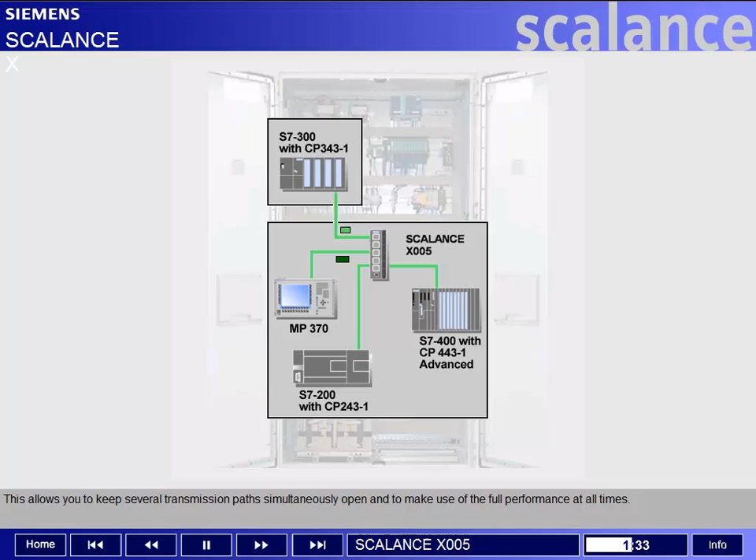Unlike a hub, which is a simple distributor of incoming data to all ports, the Scalance X005 is a full-fledged switch which transmits messages only to those stations for which they are intended. This allows you to keep several transmission paths simultaneously open and to make use of the full performance at all times. This functionality is housed in a robust and compact casing. Protection to IP30 ensures its suitability for industrial use.

Because of its variety of installation options, the Scalance X005 always finds its place inside a control cabinet, on a top hat rail, on an S7-300 rail, or in various positions directly on the wall. The station connections are equipped with a retaining collar designed to take up the rugged Fast Connect plugs. The plugs are snapped into place on the housing and provide extra strain and bend relief.

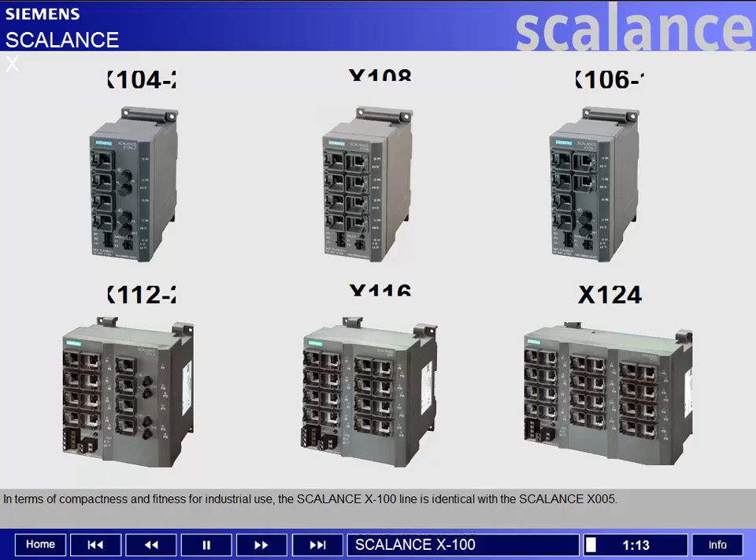In terms of compactness and fitness for industrial use, the Scalance X100 line is identical with the Scalance X005. The two systems differ mainly in the number and design of the network connections. Depending on the version, 4 to 24 electrical and in combination up to 2 optical ports are available. In addition, the devices have their own simple diagnostic mechanisms.

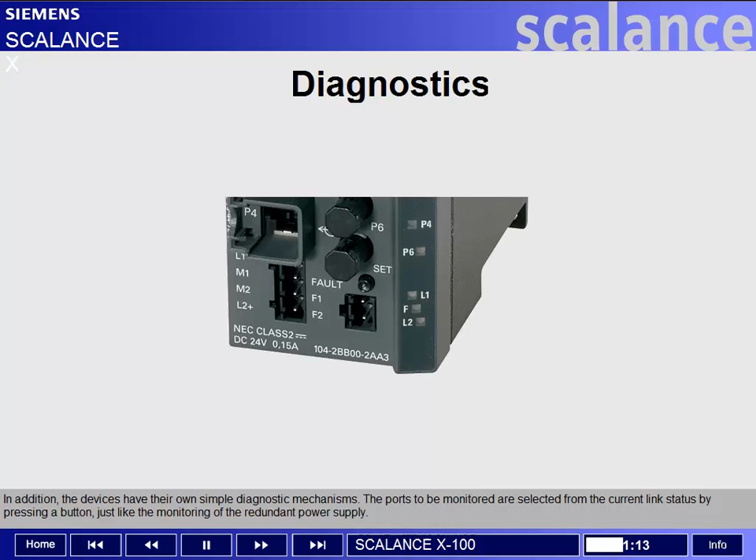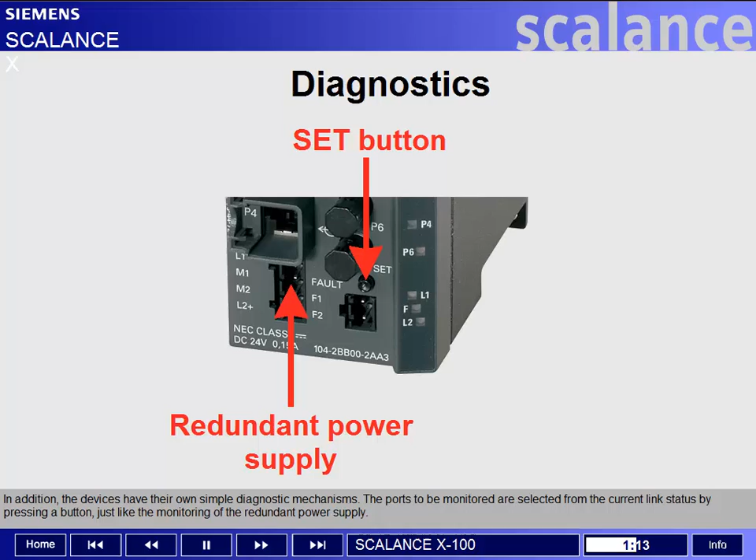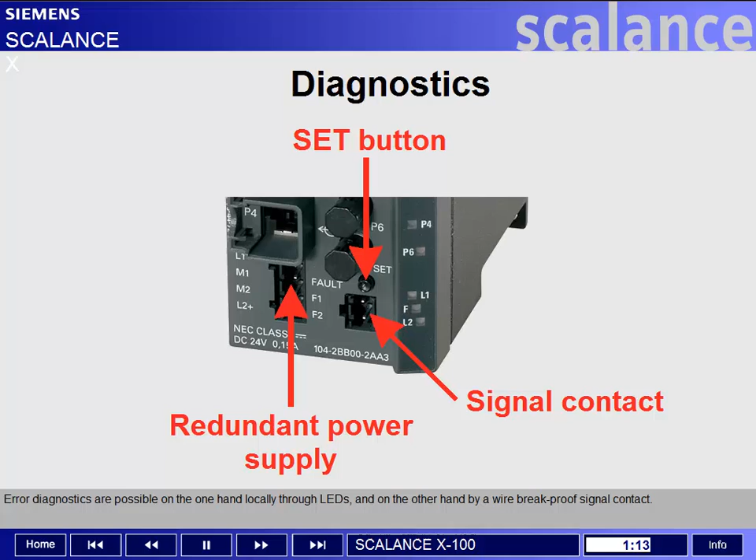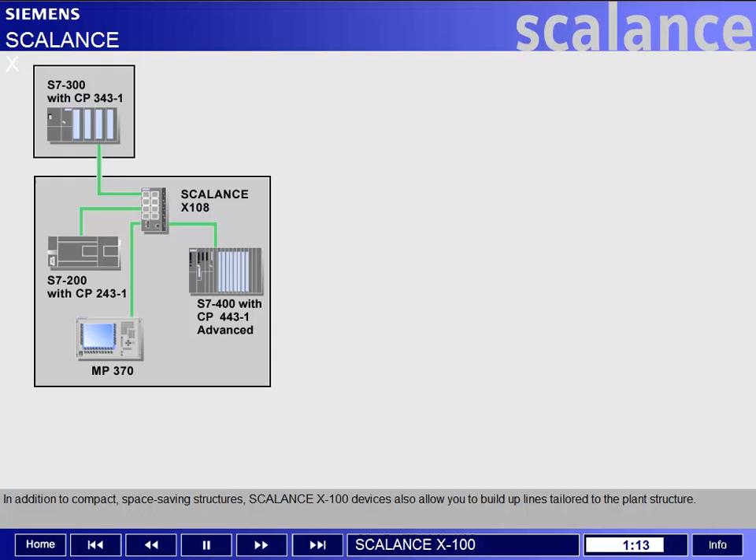The ports to be monitored are selected from the current link status by pressing a button, just like the monitoring of the redundant power supply. Error diagnostics are possible on the one hand locally through LEDs and on the other hand by a wire breakproof signal contact. In addition to compact space-saving structures, Scalance X100 devices also allow you to build up lines tailored to the plant structure. In particular, it is possible to bridge high interference areas or large distances of up to several kilometers by optical fiber sections.

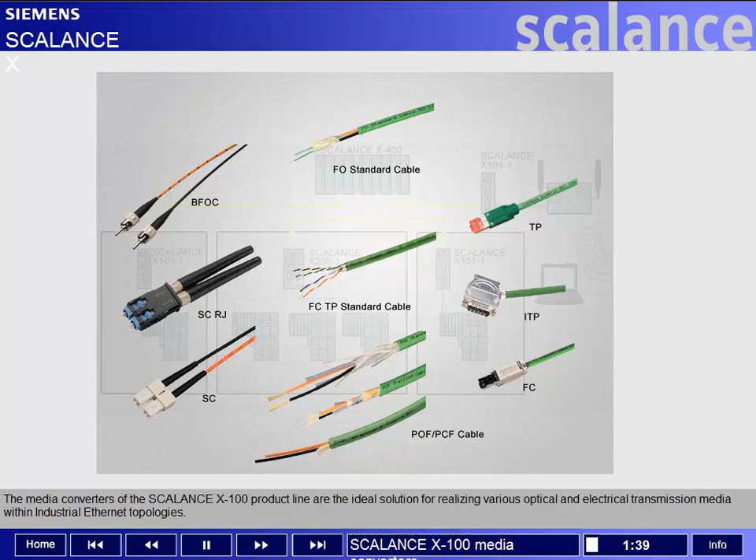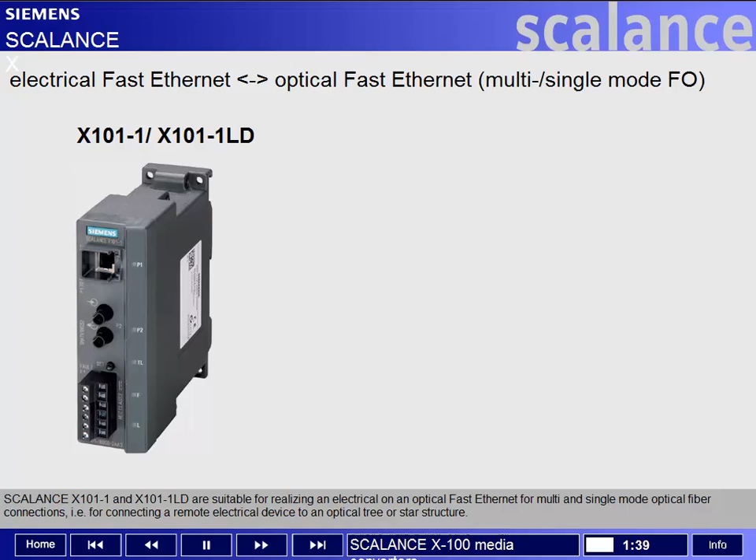The media converters of the Scalance X100 product line are the ideal solution for realizing various optical and electrical transmission media within industrial Ethernet topologies. The design of the unmanaged media converters is based on the Scalance X100 switches. Scalance X101-1 and X101-1LD are suitable for realizing an electrical on an optical fast Ethernet for multi- and single-mode optical fiber connections, i.e. for connecting a remote electrical device to an optical tree or star structure.

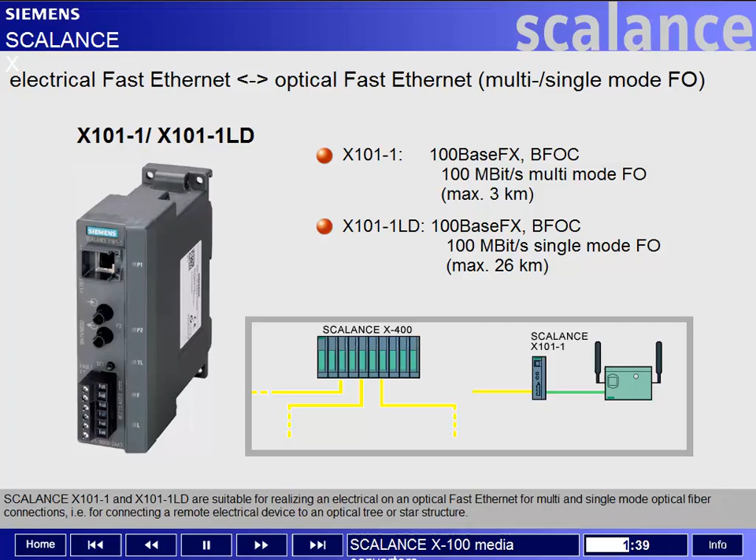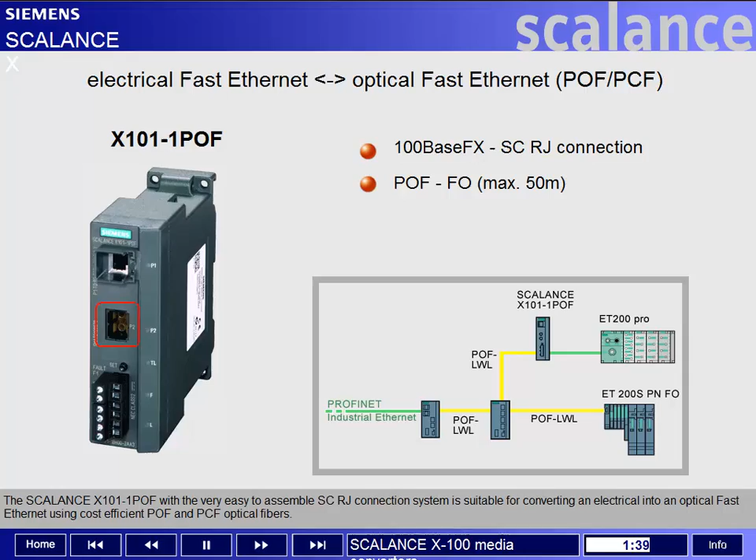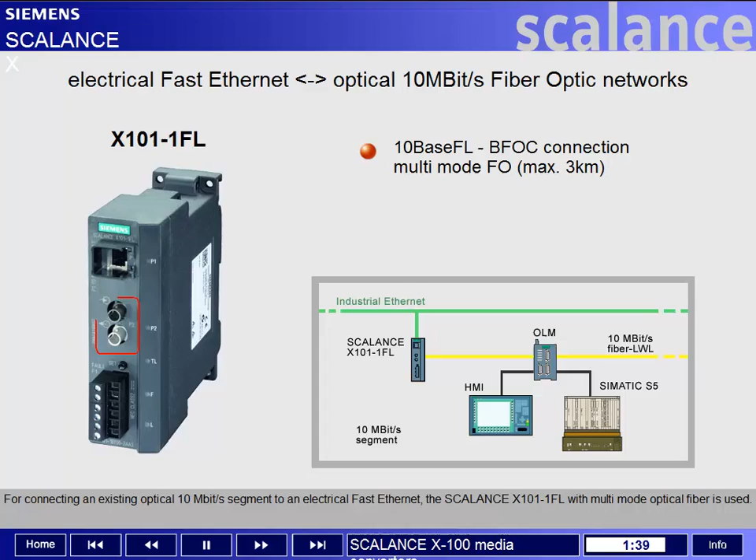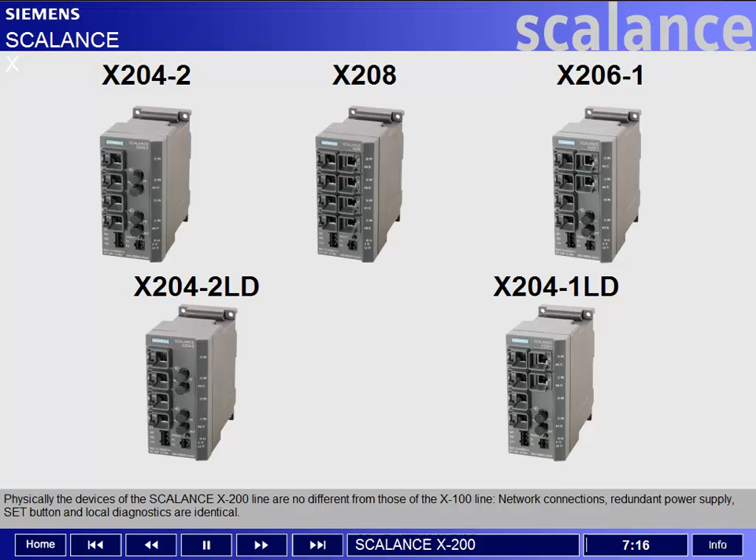Physically, the devices of the Scalance X200 line are no different from those of the X100 line. Network connections, redundant power supply, set button, and local diagnostics are identical. The differences consist first of all in the extended diagnostic features, either by web-based management, by the SNMP protocol, or via Profinet. Web-based management allows easy access to diagnostic information of the Scalance X200 device via intranet or internet using a web browser. Information on ports and their link status can be easily retrieved, and various remote device settings made.

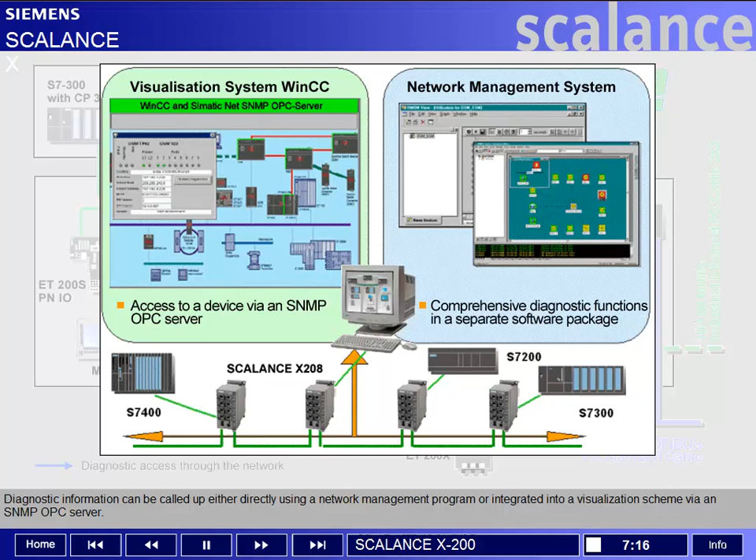The devices also support the SNMP network management protocol, which is normally used in corporate networks for remote diagnostics. Diagnostic information can be called up either directly using a network management program or integrated into a visualization scheme via an SNMP OPC server. For diagnostics within the automation network, the Scalance X200 devices support Profinet diagnostics. They are fully integrated into SIMATIC Step 7 for that purpose.

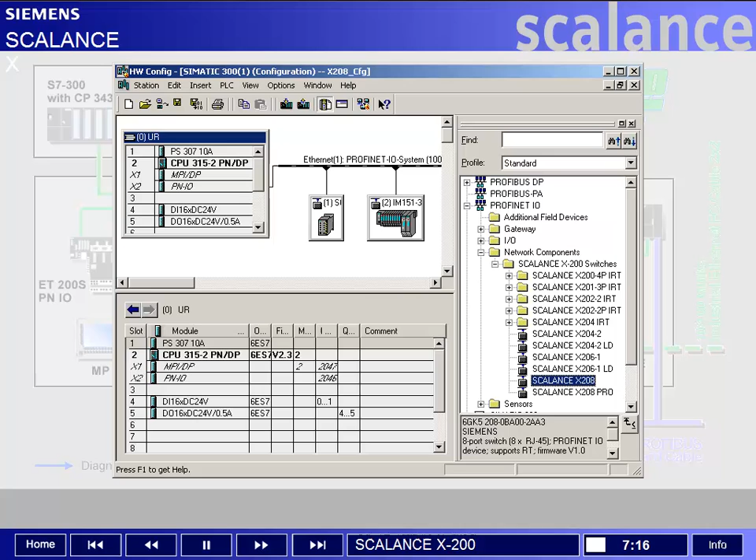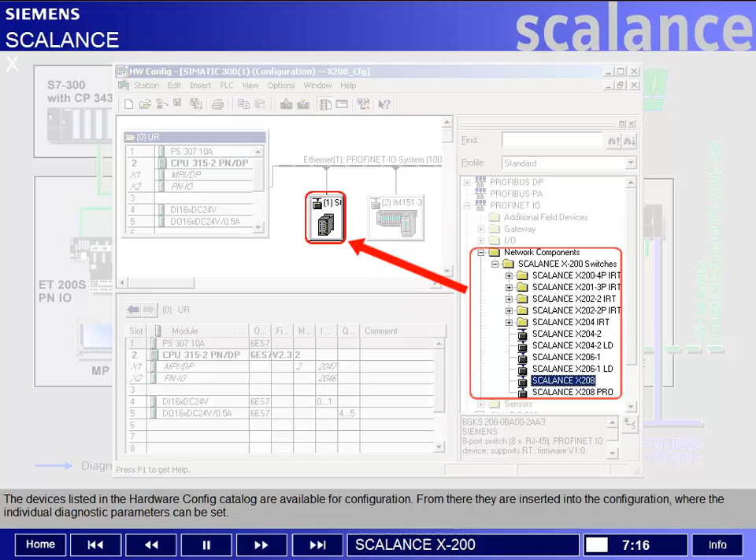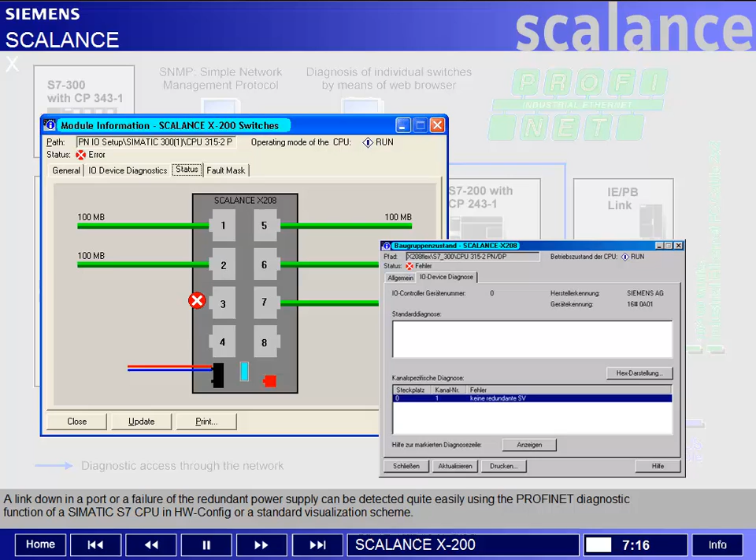The devices listed in the hardware config catalog are available for configuration. From there, they are inserted into the configuration where the individual diagnostic parameters can be set. A link down in a port or a failure of the redundant power supply can be detected quite easily using the Profinet diagnostic function of a SIMATIC S7 CPU in hardware config, or a standard visualization scheme.

Another feature of the Scalance X200 switches is the possibility to use them in ring structures. Network availability can be dramatically increased by passive ring redundancy in a ring with high-speed redundancy, i.e. switchover times of less than 300 milliseconds. Since ring ports are freely configurable, both electrical and optical sections can be implemented within a ring.

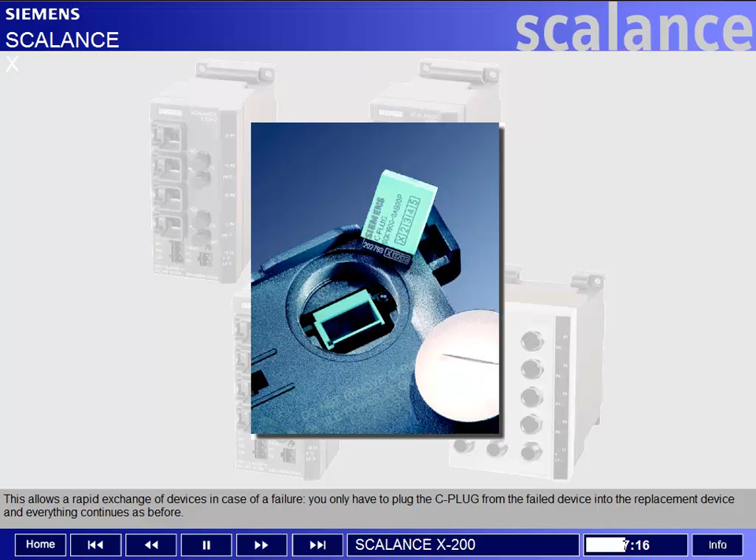In addition to saving the parameter settings internally in the Scalance X200 device, the C-plug removable storage medium can be used which holds all parameter settings of the device. This allows a rapid exchange of devices in case of a failure. You only have to plug the C-plug from the failed device into the replacement device, and everything continues as before.

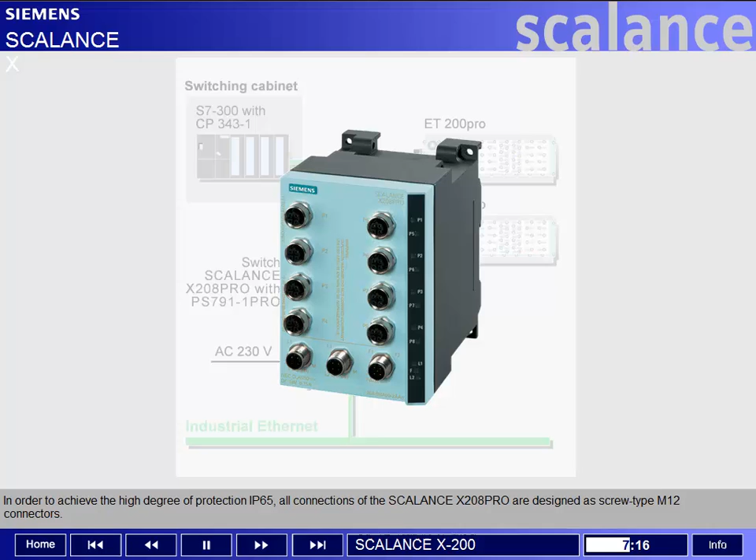Finally, the Scalance X200 line offers some designs for special applications. In order to achieve the high degree of protection IP65, all connections of the Scalance X208 Pro are designed as screw-type M12 connectors. In combination with the power supply, which also has protection to IP65, and ET200 Pro, complete sub-networks can be built up outside the control cabinet.

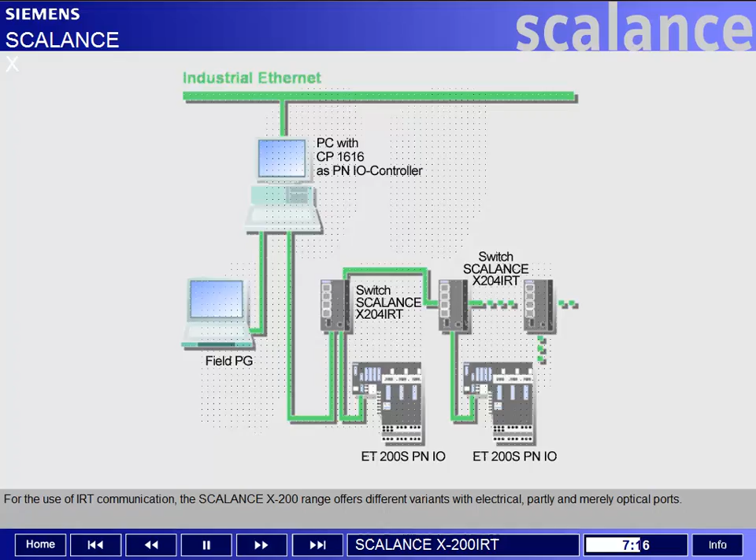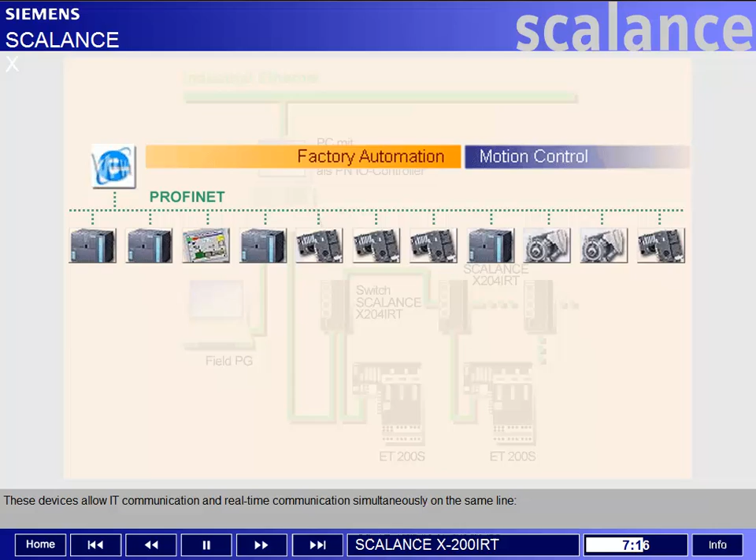With its isochronic real-time communication, Profinet offers a feature for clock-synchronized control of a great number of drives. In the paper industry, for instance, the speed of up to 100 drives can be changed within a millisecond. For the use of IRT communication, the Scalance X200 range offers different variants with electrical, partly, and merely optical ports. These devices allow IT communication and real-time communication simultaneously on the same line.

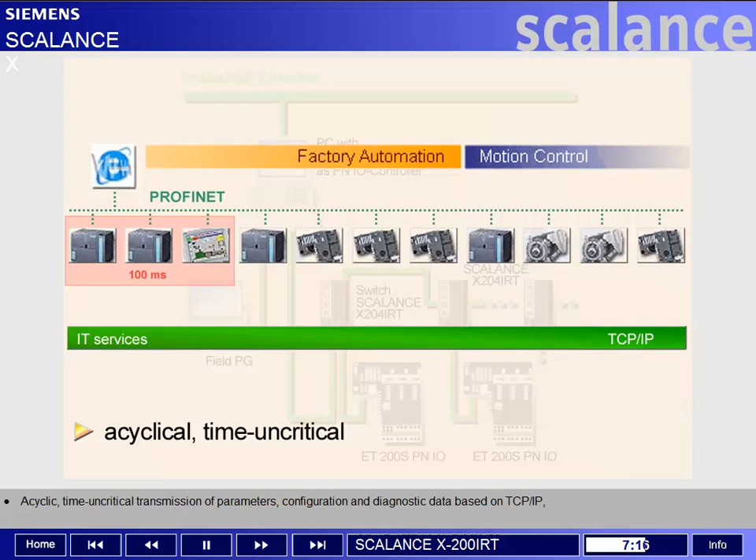Acyclic time-uncritical transmission of parameters, configuration, and diagnostic data based on TCP/IP. Real-time communication for the transmission of cyclic time-critical process data, as with Profibus DP, and isochronic real-time communication IRT for clock-synchronized data transmission, especially in the field of motion control.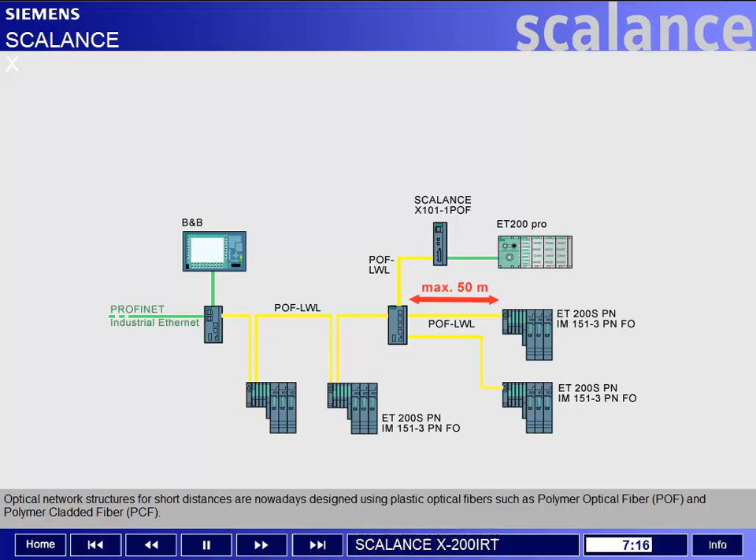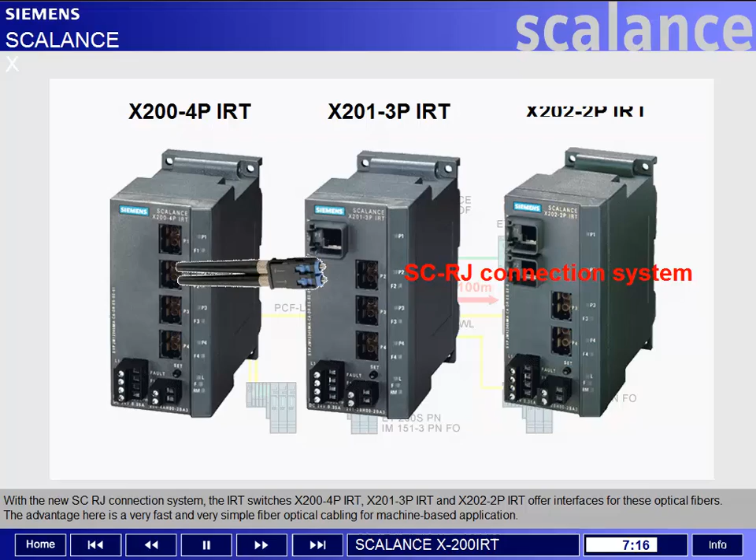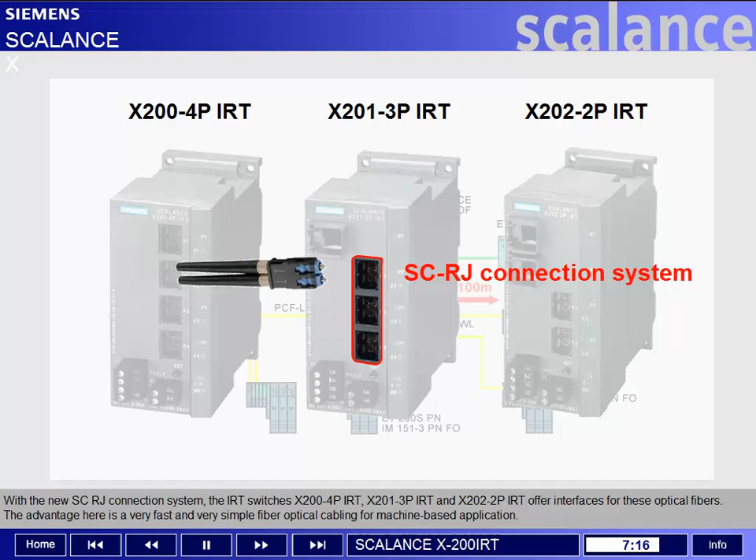Optical network structures for short distances are nowadays designed using plastic optical fibers such as polymer optical fiber, POF, and polymer cladded fiber, PCF. With the new SC-RJ connection system, the IRT switches X200 4P IRT, X201 3P IRT, and X202 2P IRT offer interfaces for these optical fibers. The advantage here is a very fast and very simple fiber optical cabling for machine-based application. SIMATIC Net offers suitable assembly kits for POF and PCF systems.

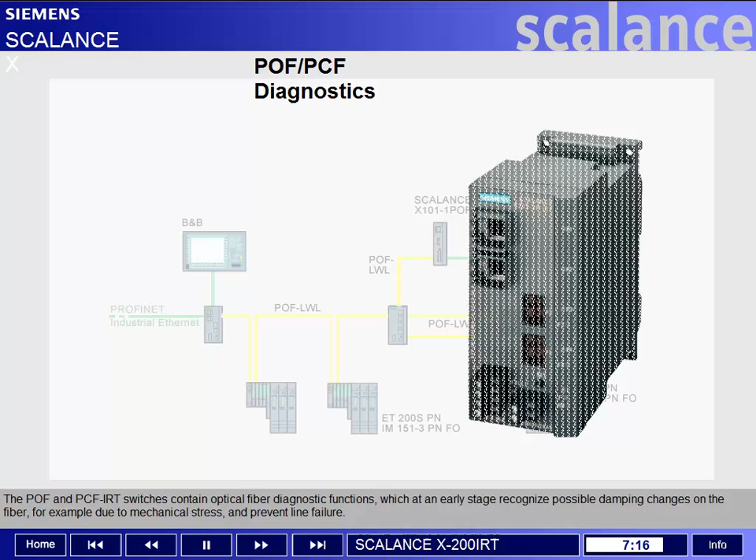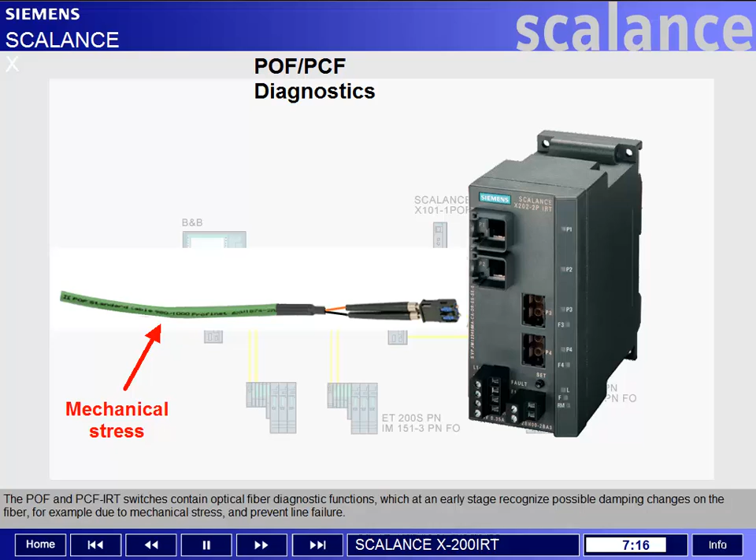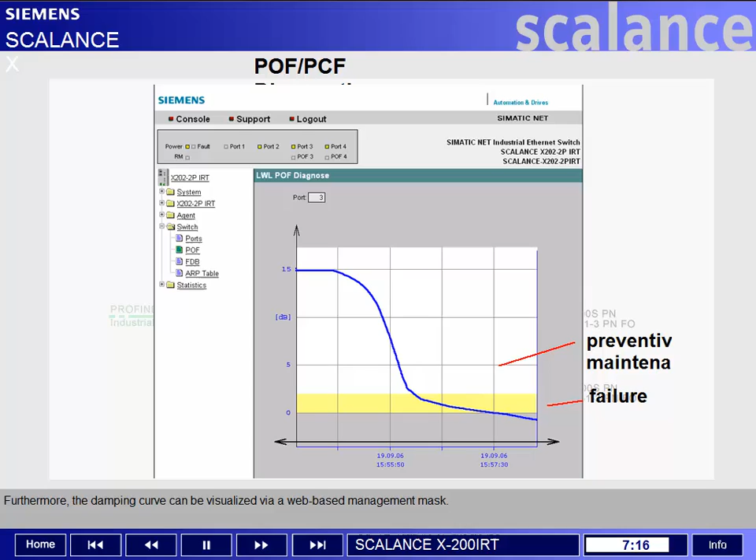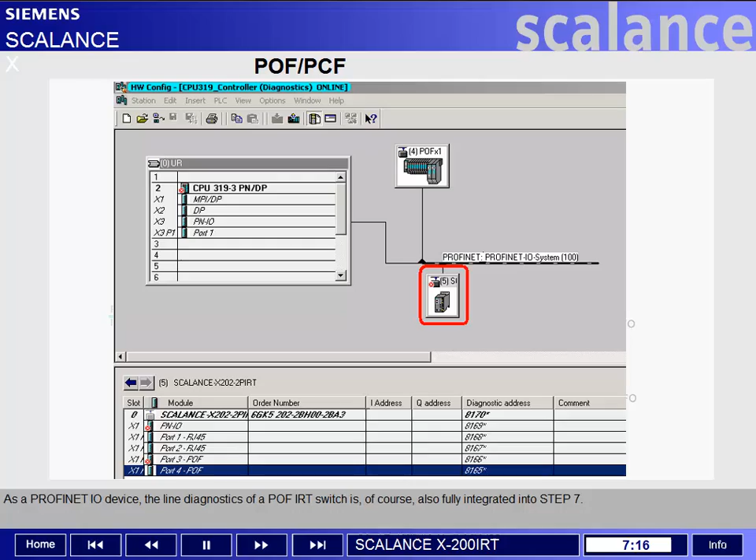The POF and PCF IRT switches contain optical fiber diagnostic functions, which at an early stage recognize possible damping changes on the fiber, for example due to mechanical stress, and prevent line failure. In addition to the standard port LEDs, these switches have diagnostic LEDs for optical ports. Furthermore, the damping curve can be visualized via a web-based management mask. As a Profinet I/O device, the line diagnostics of a POF IRT switch is, of course, also fully integrated into Step 7.

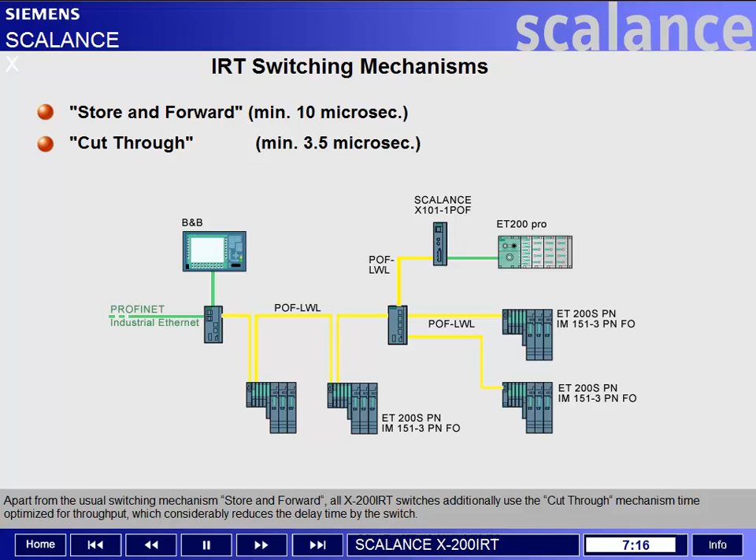Apart from the usual switching mechanism, store and forward, all X200 IRT switches additionally use the cut-through mechanism, time optimized for throughput, which considerably reduces the delay time by the switch. Apart from the real-time requirement of Profinet I/O, the X200 IRT switches also fulfill the stringent requirement of Profinet IRT. Additionally, the IRT switches can be employed as redundancy manager with high-speed redundancy in ring topologies. The connected line is monitored via the ring ports. As an alternative to the redundancy manager mode, the X200 IRT switches can be employed for a redundant linking of two network segments. One switch is configured as standby master, whereas the other is configured as standby slave.

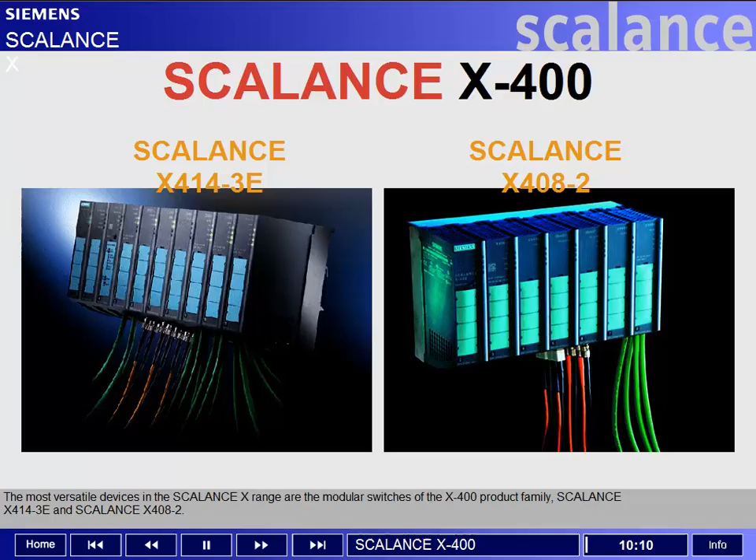The most versatile devices in the Scalance X range are the modular switches of the X400 product family, Scalance X414-3E and Scalance X408-2. Their scope of application ranges from supporting high-performance redundant optical or electrical gigabit ring topologies on the one hand, to the interface between automation network and company network with VLANs, rapid spanning tree protocol, IGMP, and for X414-3E layer 3 routing on the other. In the following section, we show you the design of an X408-2 and an X414-3E.

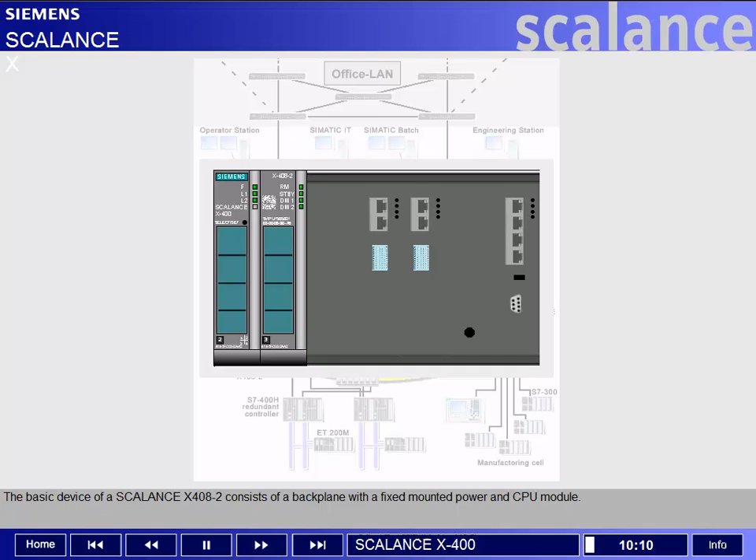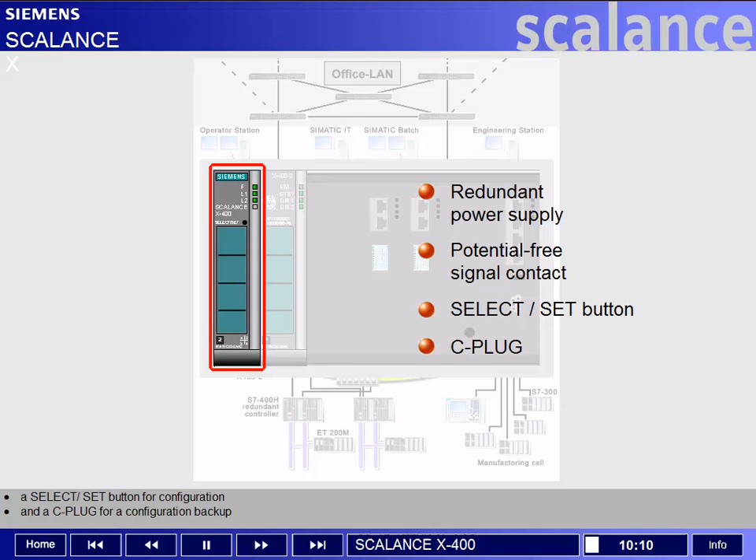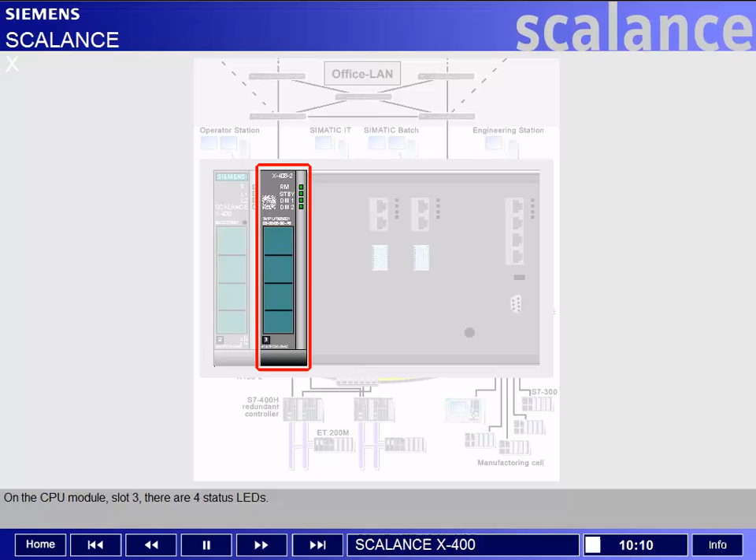The basic device of a Scalance X408-2 consists of a backplane with a fixed-mounted power and CPU module. Due to the power module in slot 2, the Scalance X408-2 has a redundant power supply, a potential-free signal contact used to monitor the supply voltage or a faulty link status of a port, a Select/Set button for configuration, and a C-plug for a configuration backup. On the CPU module, slot 3, there are 4 status LEDs. On slot 8, there is a serial RS-232 interface for configuration of the switch using a command interpreter and for an update of the switch firmware.

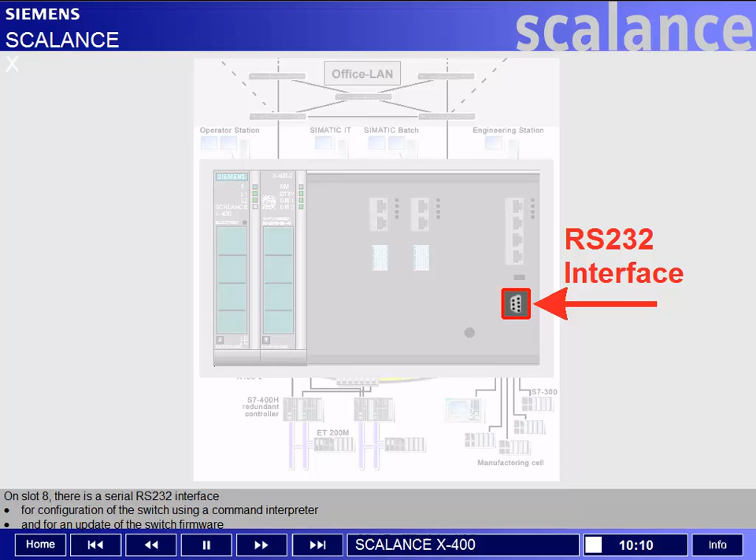The basic equipment of the Scalance X408-2 includes 4 electrical fast Ethernet ports on slot 8 and a total of 4 electrical gigabit ports on slots 5 and 6. 2 of these ports can be configured as ring ports. By plugging media modules, the 4 electrical gigabit ports can be reset to optical gigabit Ethernet or fast Ethernet connections. The respective single-mode or multi-mode types can be employed as media modules.

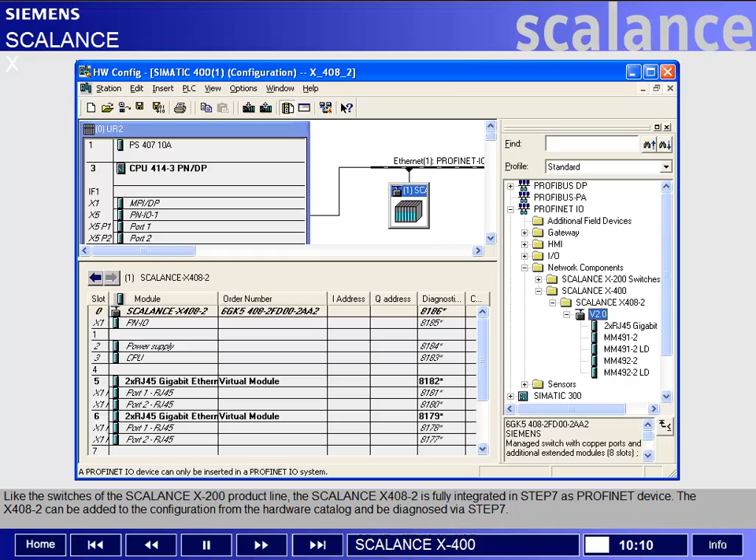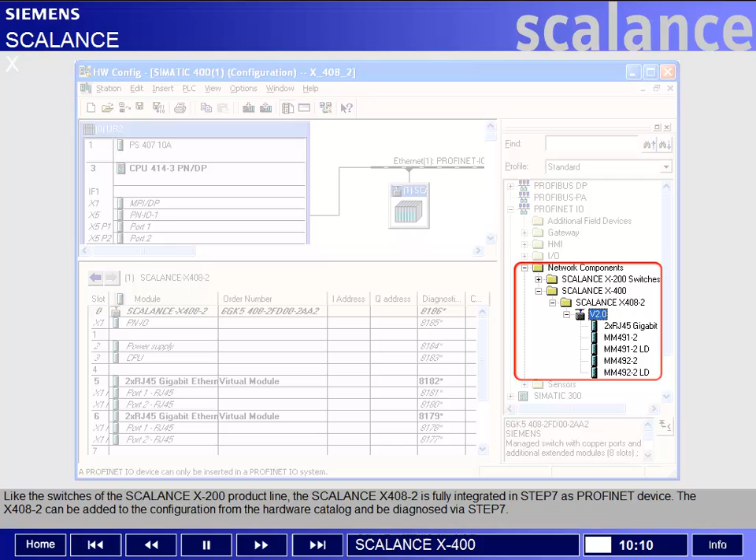Like the switches of the Scalance X200 product line, the Scalance X408-2 is fully integrated in Step 7 as Profinet device. The X408-2 can be added to the configuration from the hardware catalog and be diagnosed via Step 7. The basic device of the Scalance X414-3E consists of the power module, the digital input module, and the switch CPU.

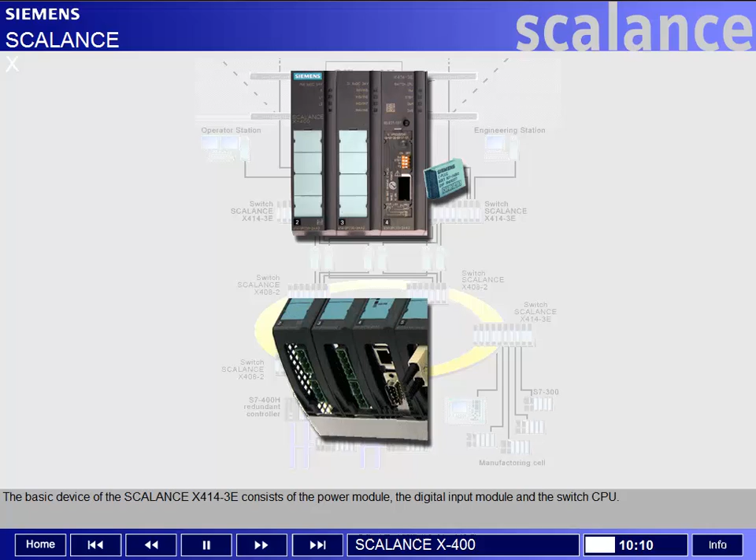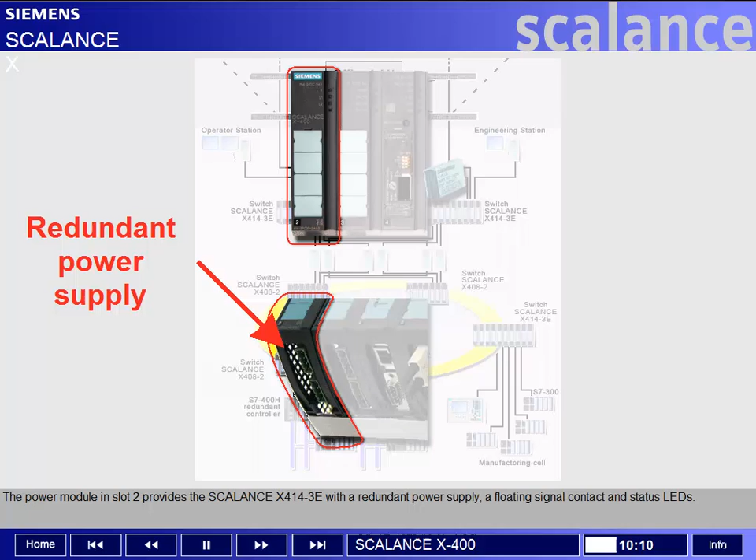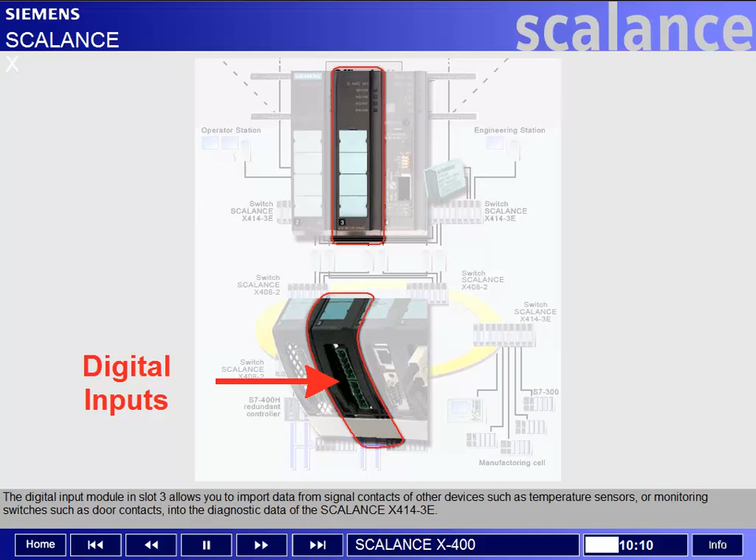The power module in slot 2 provides the Scalance X414-3E with a redundant power supply, a floating signal contact, and status LEDs. The digital input module in slot 3 allows you to import data from signal contacts of other devices, such as temperature sensors or monitoring switches such as door contacts, into the diagnostic data of the Scalance X414-3E.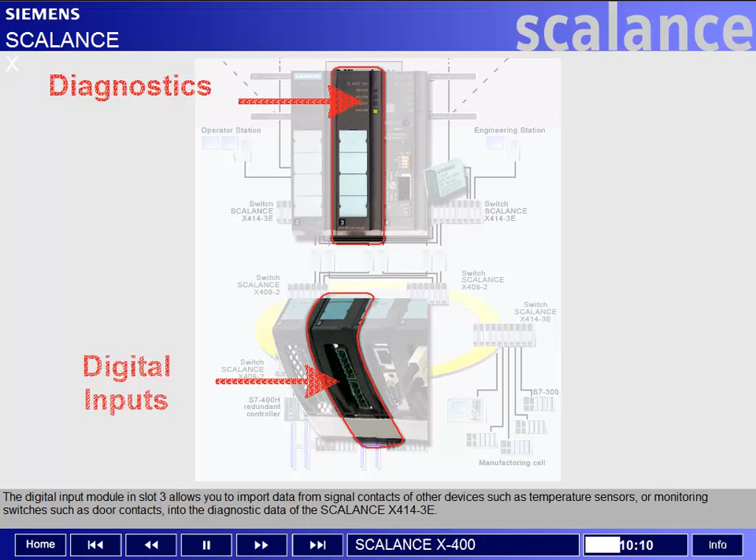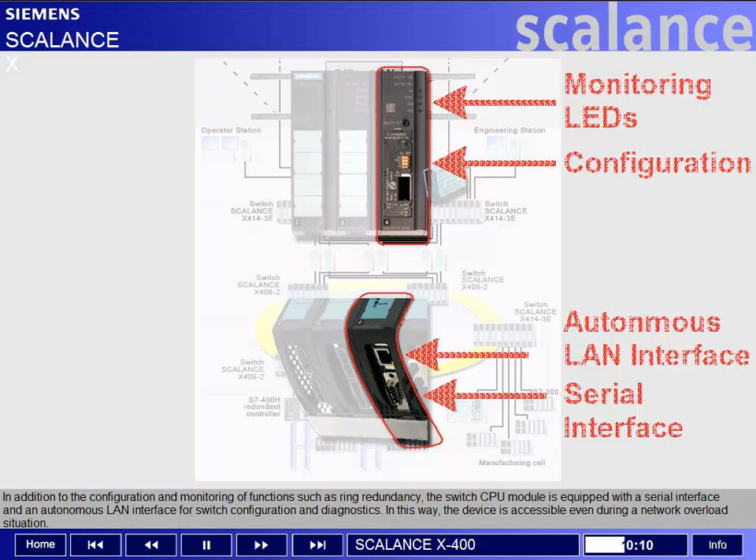In addition to the configuration and monitoring of functions, such as ring redundancy, the switch CPU module is equipped with a serial interface and an autonomous LAN interface for switch configuration and diagnostics. In this way, the device is accessible even during a network overload situation. Here again, the C-plug removable storage medium is available for a rapid exchange of devices in case of a failure.

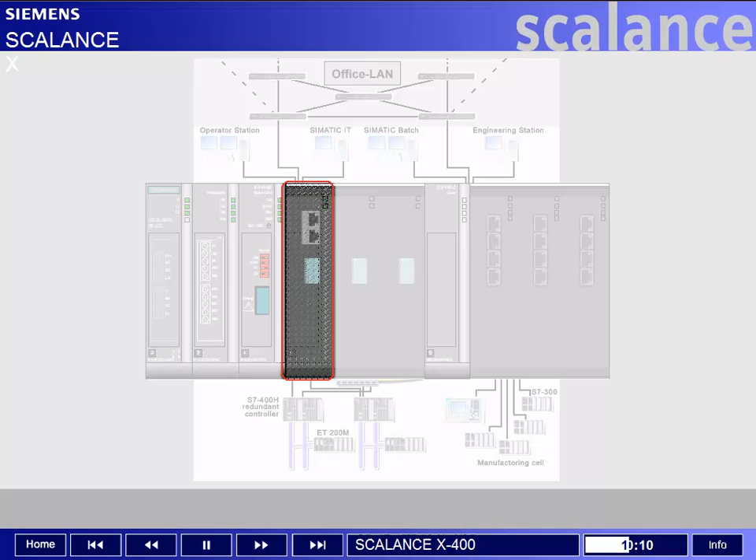In its basic version, the Scalance X414-3E is equipped with 2 electrical gigabit ports, which can be configured, for instance, as ring ports for a high-speed ring. An optical gigabit module in this slot allows data transmission using multi-mode or single-mode optical fiber. Slots 6 and 7, which are at first empty, can be equipped with 2 optical fast Ethernet media modules with 2 ports each.

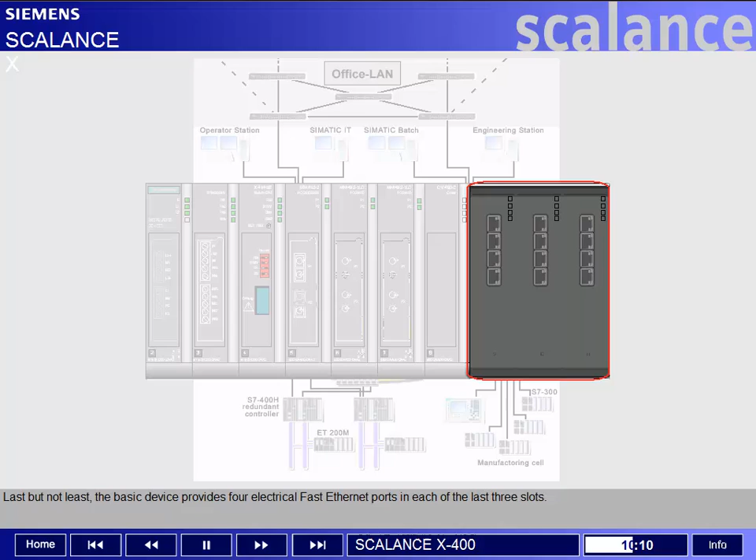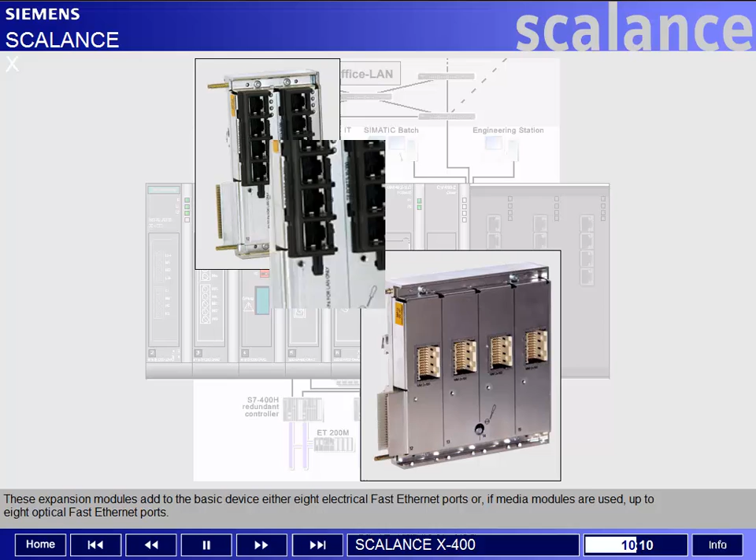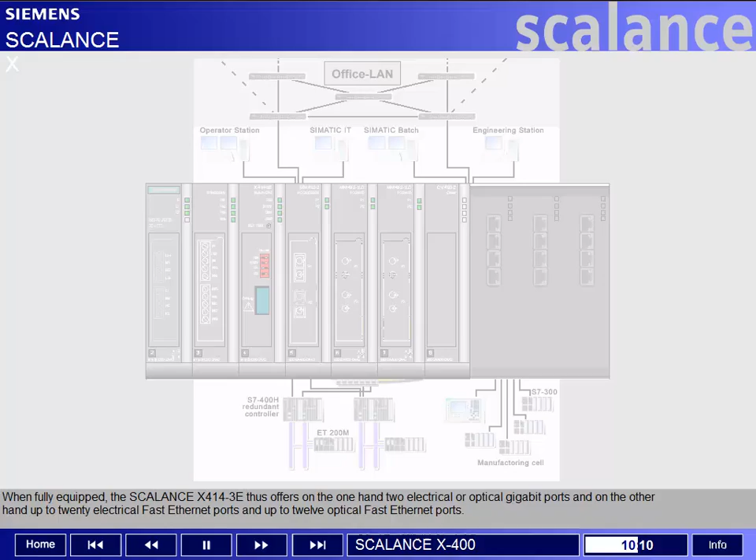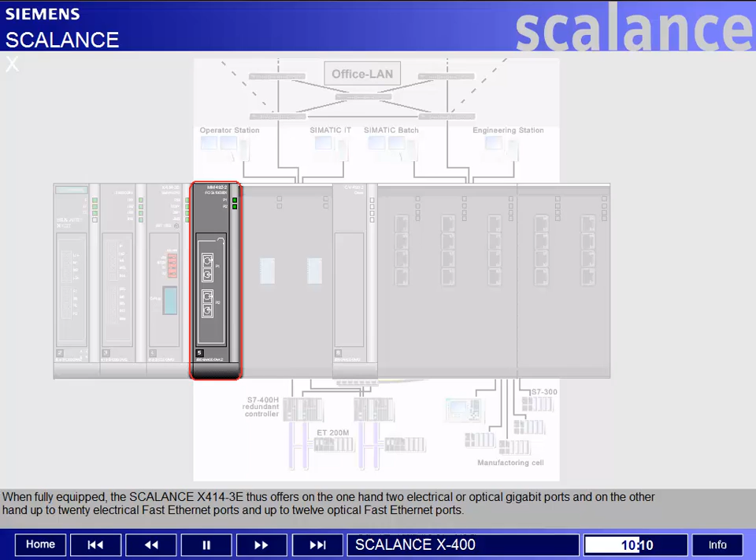Last but not least, the basic device provides 4 electrical fast Ethernet ports in each of the last 3 slots. Where the ports of the basic device are not sufficient, the Scalance X414-3E offers 2 alternative expansion modules. These expansion modules add to the basic device either 8 electrical fast Ethernet ports, or, if media modules are used, up to 8 optical fast Ethernet ports. When fully equipped, the Scalance X414-3E thus offers on the one hand 2 electrical or optical gigabit ports, and on the other hand up to 20 electrical fast Ethernet ports and up to 12 optical fast Ethernet ports.

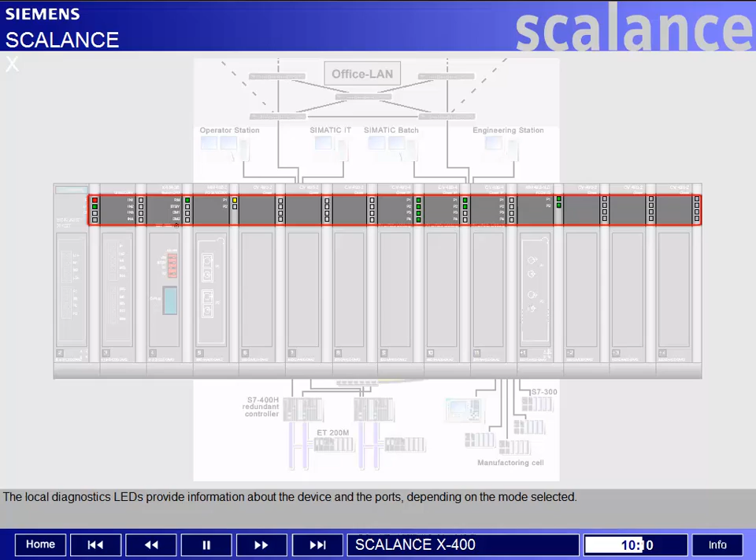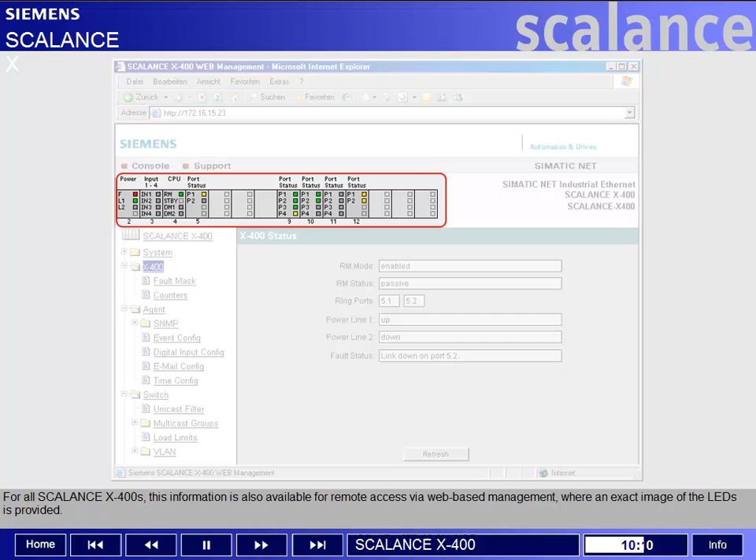The local diagnostics LEDs provide information about the device and the ports, depending on the mode selected. For all Scalance X400s, this information is also available for remote access via web-based management, where an exact image of the LEDs is provided. The current port status, the transmission rate, the duplex mode or the port monitoring can be viewed at a click of the mouse.

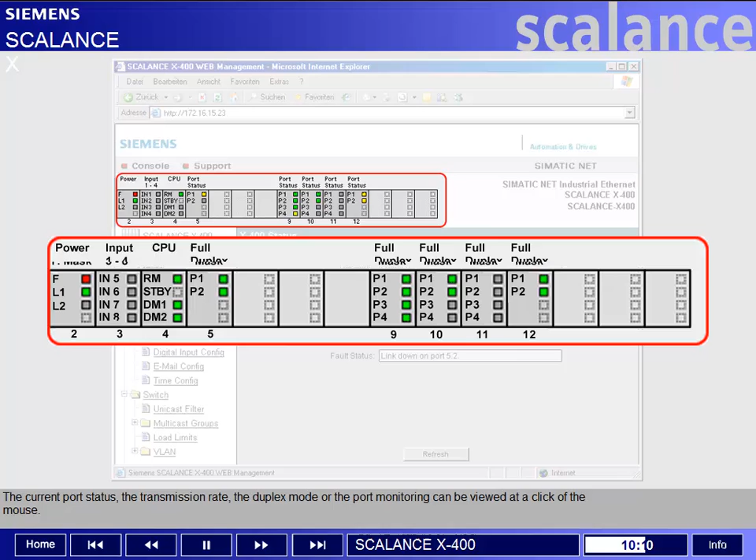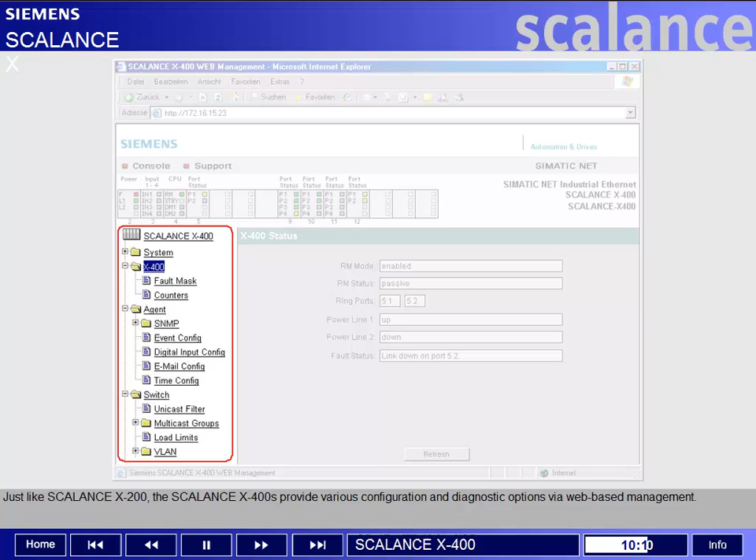Just like Scalance X200, the Scalance X400s provide various configuration and diagnostic options via web-based management. Configuration of the diagnostics via SNMP is possible, just as retrieval of an event log table. A special feature of the switches of the Scalance X400 product line is that they support Office IT standards, which makes them the ideal interface between automation and company networks: VLANs or virtual LANs, the Rapid Spanning Tree Protocol, IGMP snooping, and IP routing for X414-3E.

The segmentation of a LAN used to require the setup of several parallel networks, all with their own distributors and separate cable paths. In contrast, VLANs, i.e. virtual LANs, are logical networks which are simulated by switches and are all based on one and the same physical network. VLANs require much less cabling while providing the full communication bandwidth, as well as protection against outside access, since communication is limited to the stations of the VLAN. Whether a port of a Scalance X414-3E or X408-2 is part of the VLANs is simply defined by software parameter settings.

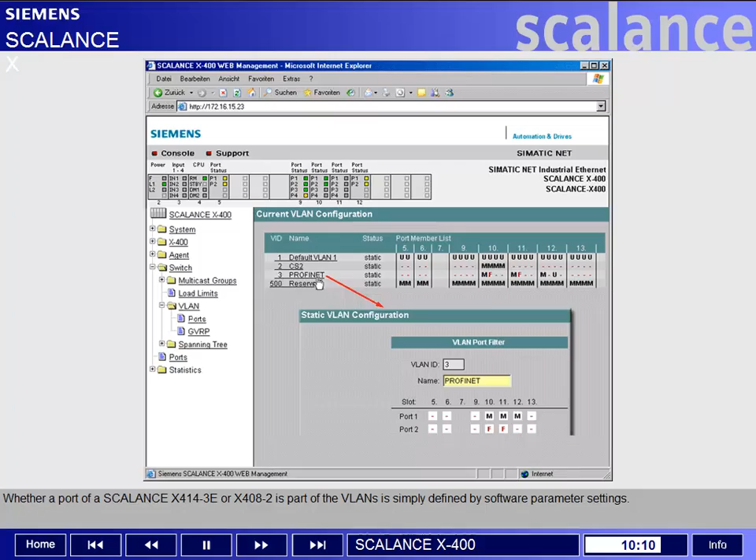The Scalance X414-3E can also be configured as a Layer 3 router, which enables interconnecting different IP subnets. The Scalance X414-3E can manage the standard router protocols RIPv2 and OSPFv2, which enables synchronizing the configuration with other routers in the network.

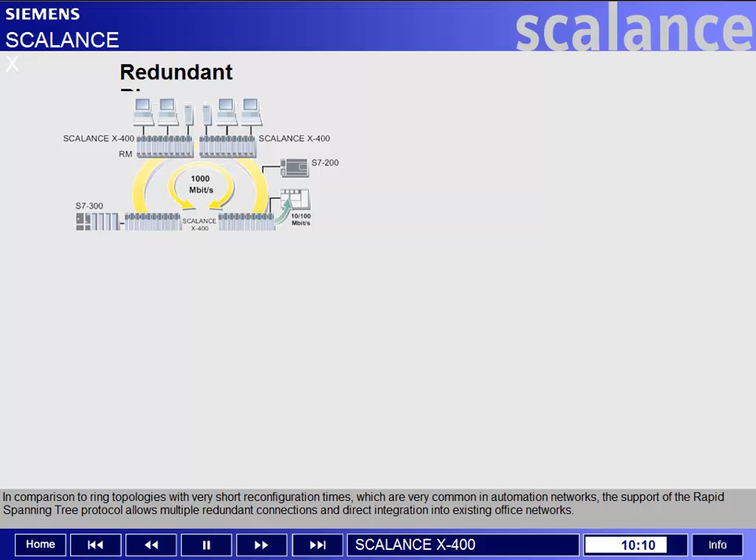In comparison to ring topologies with very short reconfiguration times, which are very common in automation networks, the support of the rapid spanning tree protocol allows multiple redundant connections and direct integration into existing office networks. Although meshed communication networks provide alternative connections in case of a connection failure, such a situation leads to the creation of loops which multiply the messages transferred.

Therefore, the rapid spanning tree protocol temporarily deactivates in a first step all redundant connections, starting from a defined network node and taking into account the efficiency of the individual connections. The failure of a network is detected in a very short time by a kind of live message, and the system switches over automatically to the next favorable alternative connection.

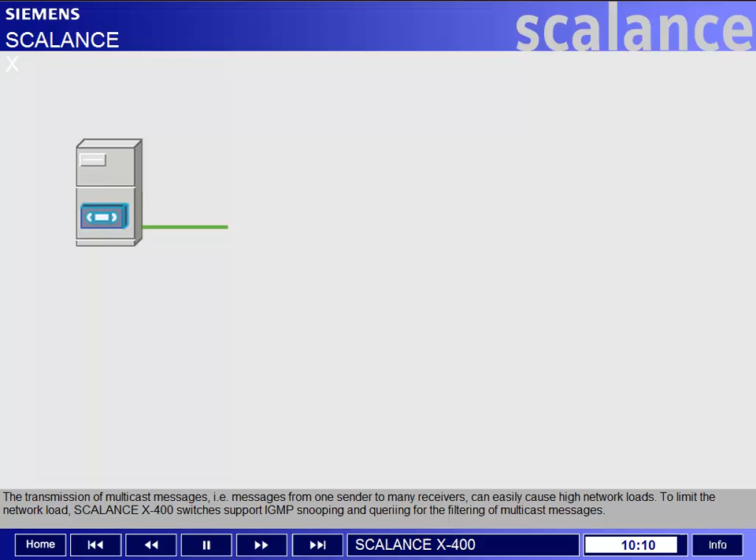The transmission of multicast messages, i.e. messages from one sender to many receivers, can easily cause high network loads. To limit the network load, Scalance X400 switches support IGMP snooping and querying for the filtering of multicast messages. Using the IGMP messages join and leave, network stations can log on and off to the switch for a certain multicast group, so that they receive the respective multicast data, such as video or audio streams, only if required.

Since it supports virtual LANs, IP routing, the rapid spanning tree protocol, and multicast filtering, the Scalance X400 product line is ideally suited for use as an interface between the automation network and the office network.